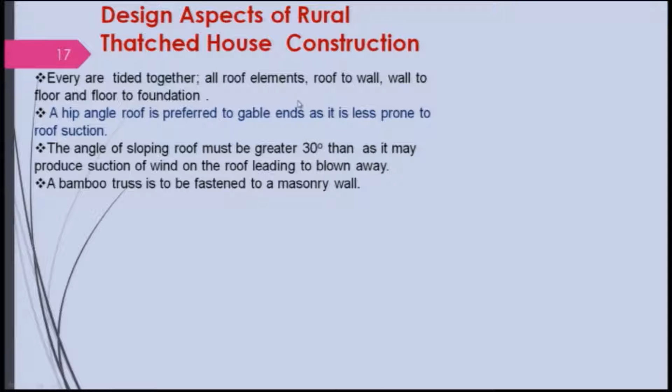As we have seen in a thatched house, several elements will be there. For example, the roof will be made of maybe bamboo, forming a truss. There will be others also, like rafters, which you can call a spar, and this you can call a reeve, and this is a truss.

This truss has to be connected with the column, and all the roof elements, which are part of the roof, have to be joined together.

That is the first important thing, and then the roof has to be joined to the wall and also to the column. In this case it is joined here, but in earlier days people were using coir rope, and later on people started using iron nails.

Again, the wall to the floor and floor to foundation, which is not shown here, are very important and have to be joined, otherwise the structure will not be stable.

Besides this, there are two kinds of roofs one can think of: one is the hip roof, and the other is the gable roof. There is an overhang here, which you can call overhang.

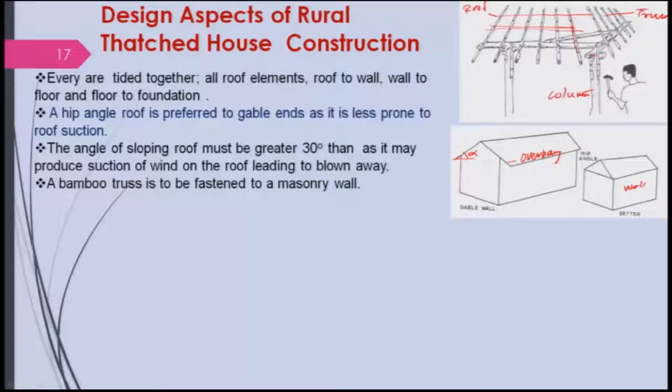Looking at the angle of sloping of the roof, it must be greater than 30 degrees, as a smaller angle may produce suction of wind on the roof leading to it being blown away. If this angle, say alpha, is small, like 10 to 15 to 20 degrees, it is generally recommended that it be more than 30. The question arises: why?

Let me try to explain. Suppose the wind is coming like this, with this angle. If it comes this way, I can resolve this with the angle here.

So this angle is alpha, and if I say this is velocity v, this component will be v cos alpha, and this will be v sin alpha. Therefore, if the angle is small, this velocity v cos alpha will be higher.

And then what will happen? The static pressure on the surface of the roof will be less. We can use Bernoulli's principle: P total equals P plus half rho v cos alpha squared. That means if alpha is small, then what will happen?

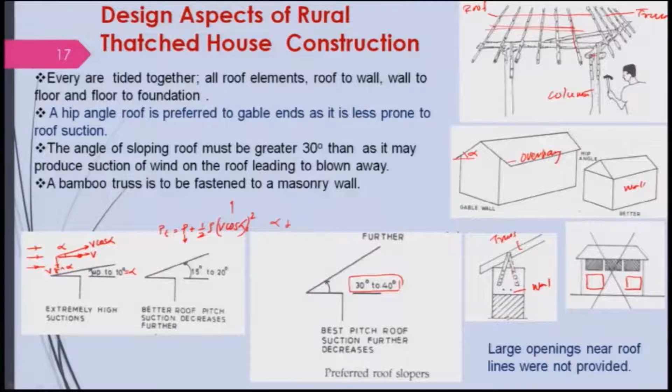But today we can put them anywhere we like, because we are using concrete and mortar, we are not bothered about it. People were very concerned. So, you can think of putting windows here in this place. Generally people go for 2, not 3, unless it is a big house with a larger width. Generally 2 are placed, so that the strength of the wall will also be retained. So, these are the kinds of scientific ideas people had at that time.

You can see this today, maybe in remote places you may find houses having this, but in modern villages where concrete and mortar are being used profusely, you will not find this kind of concept being implemented, because they do not know what they are doing, right.

Besides this there is the ventilation system, which was very important in ancient rural housing, because air velocity created discomfort, particularly when either cold or hot air blows directly onto the human being, right. You might have experienced it yourself. But if it comes tangentially or not directly, then you may feel good, provided the velocity is not that high. So, that has been taken care of in the house also.

It is important to have fresh air constantly entering the house throughout the year, not only in the summer or the rainy season, but in other seasons also. And it must also be distributed evenly to minimize sudden temperature change or drafts in the room, right. Those are taken care of by the 2 ventilation systems you can find in rural houses. One is wind driven cross ventilation, which you will know, right,

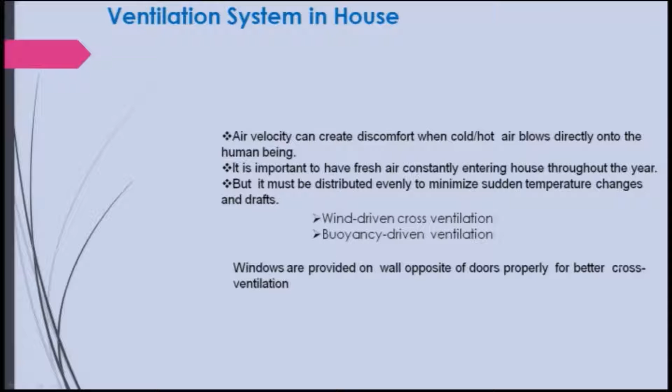and the other is the buoyancy driven ventilation system. For wind driven cross ventilation, windows are provided on the wall opposite the doors for better cross ventilation. This is your door, right, and the air can enter, and the windows are not placed just in front, rather they are put in the corner somewhere, so that the wind will enter the room and then go, right.

And sometimes some windows are placed here also in this portion, so that the wind will come over here, and that depends upon the design, so that the velocity will be distributed evenly across the room. Okay. This is the system being placed, right.

And generally houses were designed in earlier days to take advantage of the natural breeze, so that cooling can be kept. Natural ventilation relies on breezes to remove moisture, heat, odors and active gases. Several things are essential to be removed instead of closing the house. Nowadays people stay in air conditioned rooms, all closed, and the oxygen level goes down if you close it.

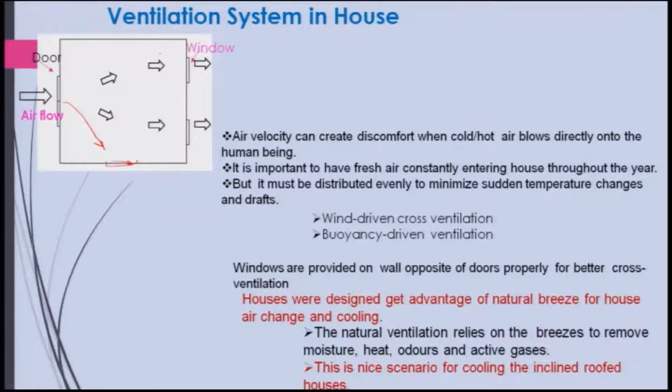And of course, we have already seen the nice scenario for cooling of inclined roofs, which we had seen earlier. Let me look at a buoyancy driven ventilation system here. Air enters here, there is a system of openings, and air will come and go here, due to what? Due to buoyancy, because heat will be coming in.

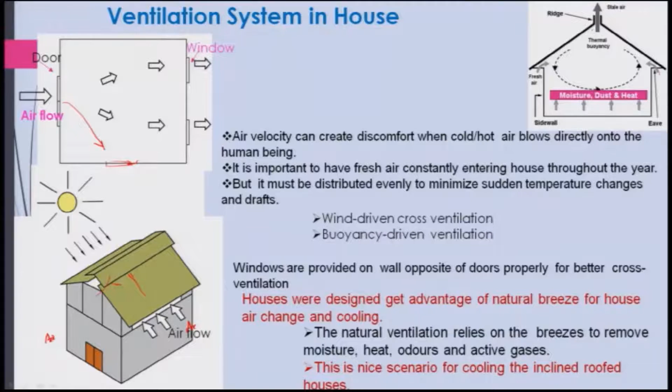So, the fresh air is entering here, and there will be some recirculations, and it will carry moisture, dust and heat to some extent, and it will be driven by buoyancy, and that helps in taking it out, and then it will be very clean. So, this is a good part of this inclined roof, and ventilation can also be provided. Those things were there in earlier houses, but unfortunately today it is not prevailing, although we say that we are very advanced.

I remember that we also used to store a lot of grains here, and there might be some holes so some air might be circulated. In some places there is an opening over here, like a ventilation system. You may find those in some houses, and it was very good. Nowadays I find people drying grains in direct sunlight, which is not supposed to be, because it spoils the nutrient values of the grain. But at that time people used to do this.

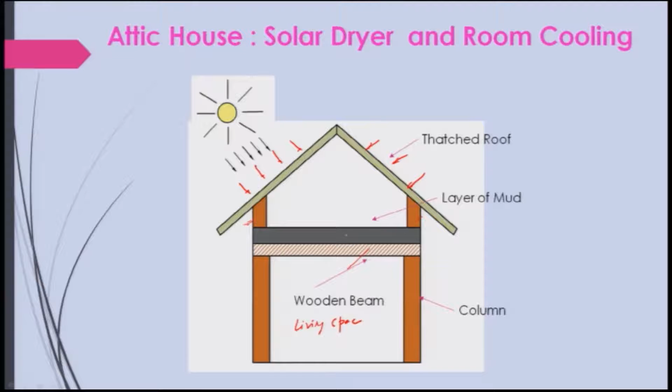And this kind of ceiling given on the top of the thatched house helps in maintaining the temperature. In summer it was cool. At least I had lived maybe a few days whenever I visited my native place, a village, and it was very good. So, it was all there, but today you will not find this kind of attic house in villages, because all our people are making concrete buildings.

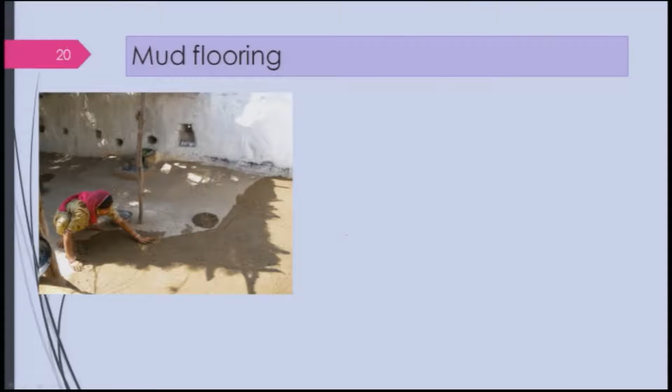And mud flooring is very important. I will be talking about it, because this is very rare to see. A woman is smearing a slurry prepared by mixing cow dung with mud, and for doing that one has to soak the floor with water for 2 to 3 hours, and too much water must not be placed, otherwise it will be difficult. But that is an art, one has to learn and then do that.

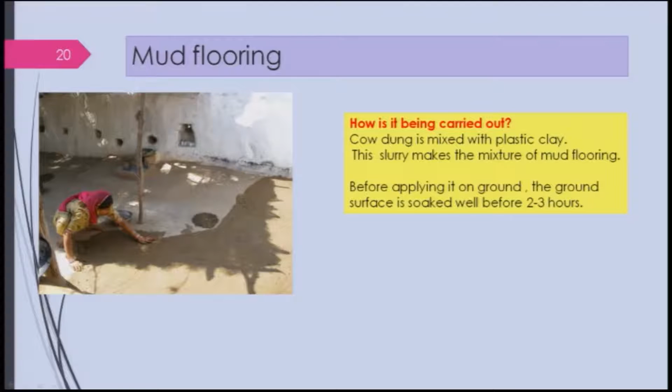And then you will have to smear this slurry with either hand or with the help of maybe some brush kind of thing made out of cloth. Of course, she is doing it with her own hand. And what are the advantages one may think of? If you look at it, this is free of cost, because the cow dung is available.

It is a part of rural India where agriculture is the main way of living, and it will be cool in summer and warm in winter, right. That is the thing you can get, and it is environmentally friendly. It disinfects the area due to the use of cow dung.

Of course, I had a talk with somebody, they are saying that it is a little controversial. Some people claim that the pathogens get decreased because of using cow dung, but some other people say something else. So, therefore, one has to be very careful and check it. But my gut feeling is that people have been doing it for ages together and they were very healthy. So, therefore, I would believe that it may

disinfect the area, but more research is to be done in the present context of the natural imbalance that is happening. We should not take it as it is, we should check and correct and verify it and then take it.

And also it will be a little bit wavy, you can see that there is some small up and down, it is not as polished as your tiled house or mosaic house, and that helps in giving maybe acupuncture or pressure, and it will be helpful for maintaining health, and also you will not fall down there.

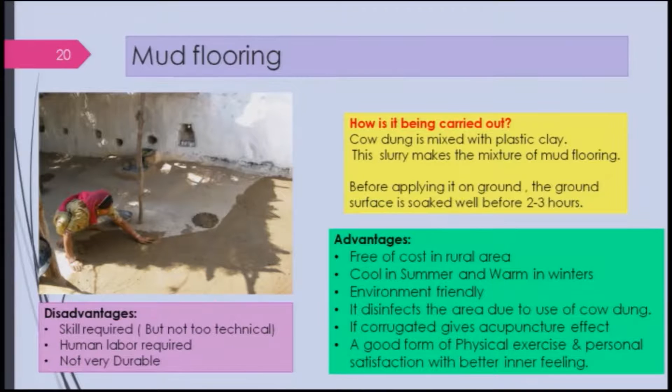So, therefore, this is what our ancestors were doing in ancient India. So, we need to look at it, and we can relearn it and do it whatever way we can at this moment. I will be showing some of the things that people have improvised. Maybe when I come to the mud wall in particular, I will show how people have improvised it.

And if you look at wall materials, there are several of them, like wooden wall, bamboo reinforced mud wall, grass and tree branch reinforced mud walls. Reinforced is not concrete mortar and iron rod, it is what people were using in earlier days, okay, it is not a new concept, it is an earlier concept.

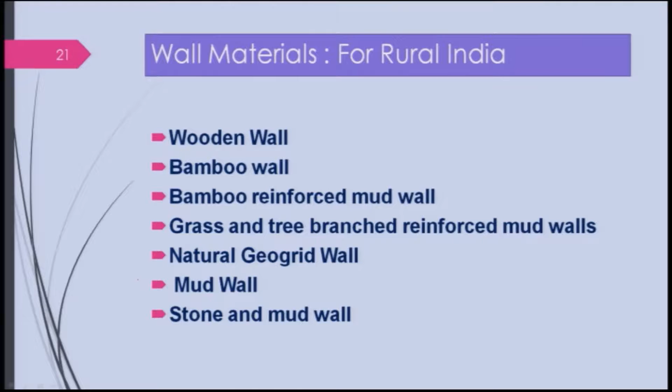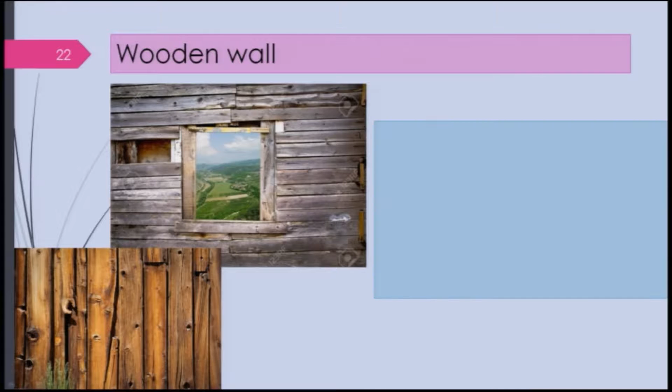Also people are talking about the natural geogrid wall, right, and of course, the mud wall I will show you a little bit more, and the stone and mud wall I will just go through, or we will learn a little bit about those things. If you look at it, the wooden wall is very simple to do, and here wooden planks are being used, like commonly these are wooden planks, right.

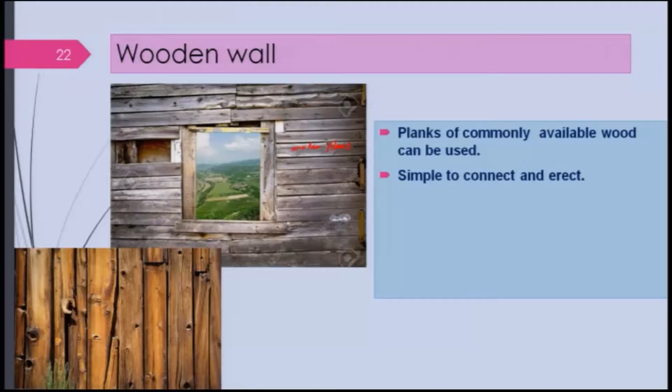And of different sizes, and it can be horizontal, it can be vertical, these are the vertical things depending on the thing, and it looks very elegant. In earlier days wood was very much available, but today of course it is a scarce commodity, and it is simple to connect and erect, because wood you can join very easily, right, and it is easy to handle, unlike your brick or the mortar or other stones, right.

And in case of earthquake it is very good, nothing will happen, that is why people in Japan use wooden houses, you might have studied, right. Even in our area, particularly in Arunachal Pradesh and the Himalaya region, people used to make wooden houses. And failures, if there are any, will not be catastrophic like your concrete and mortar structures, right.

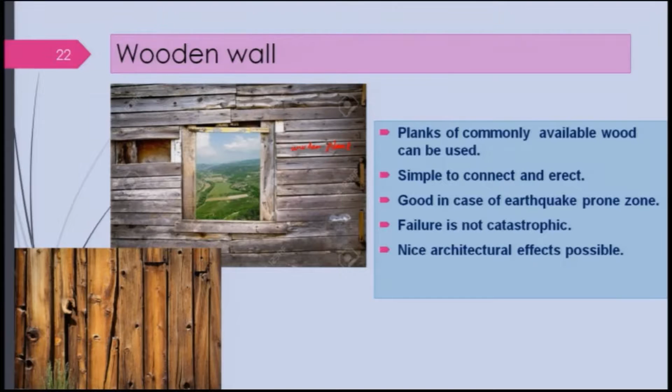And a nice architectural effect is possible, because I had lived in a wooden house, which was quite good aesthetically, you feel good about it as if you are with nature, if you love nature you feel part of it. But of course, it will have disadvantages also, like more theft cases, with the criminal activities going on in our country and other places. So, a lot of safety issues are there, and there might be termites, or other insects spoiling it, maintenance is a problem. There are several other problems associated with it.

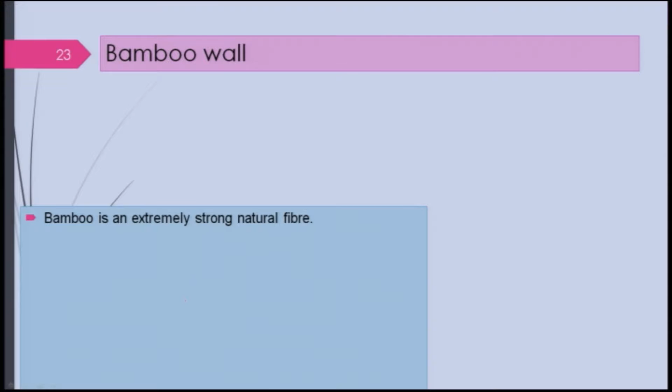Bamboo, if you look at it, is an extremely strong natural fiber. When I was a kid, bamboo was used left and right, particularly in Odisha, because we grow a lot of good bamboos, but today it is not. And it is quite light, as its specific gravity is around 0.57, its average weight is around 0.6 kg per meter, right, it is quite light.

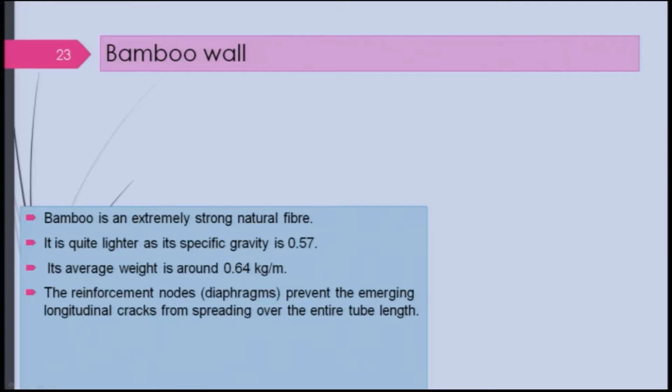And a very important thing, the reinforced nodes, like a diaphragm, prevent an emerging longitudinal crack from spreading over the entire length. Suppose there is a crack likely to occur in the bamboo, but it will not spread, because if you look at a bamboo, there will be a diaphragm here, and that will not allow it to spread. This is naturally available, you need not do anything, right.

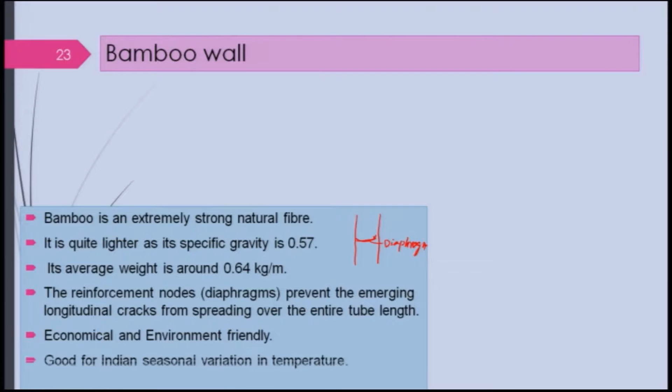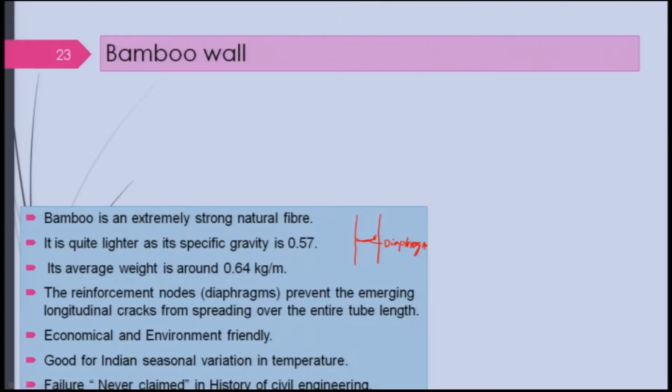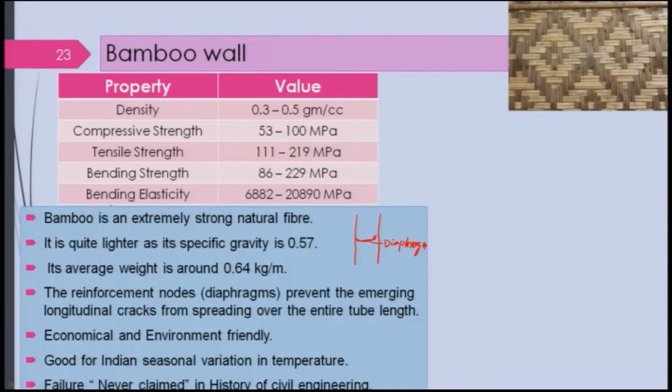And this is the house, this is the wall one can think of having been knitted. You can even think of using dresses out of bamboo. Bamboo textiles are there, you might have seen, people can produce yarn, and this is being knitted. And this is a woven bamboo wall, these are the bamboos being woven properly, right, even without mud cladding.

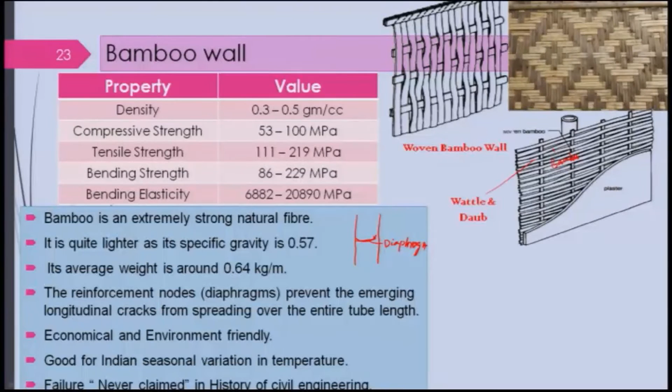And there is another one, these are the bamboos, right, and these are what we call wattle, right. And then you can have a plaster, what we call daub, and then you can use it. And there are several designs one can think of, I am showing some of them, if you go across the country, various designs in various places you will find.

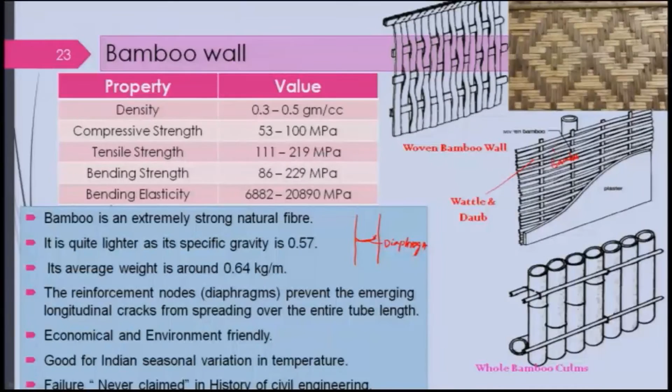I have just shown you a few of them, and I would suggest that you please take some photographs if you come across them, particularly in Arunachal Pradesh, Assam and other places, where people are still using them. If you could get and put up a picture, that will be nice, because I was searching and I could not get actual pictures.